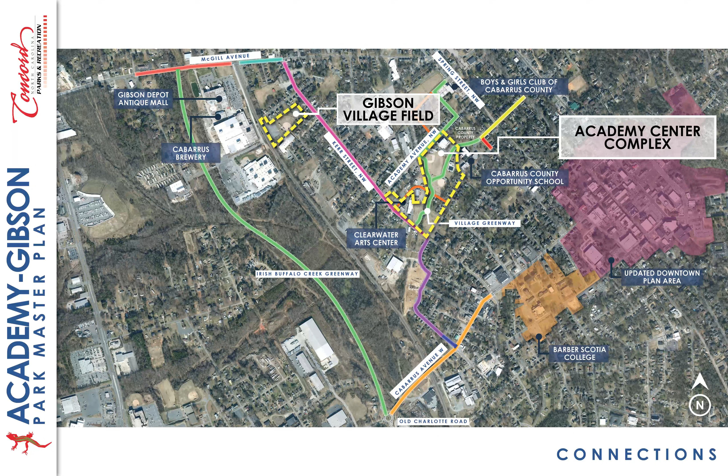In addition to plans for these areas, this presentation will suggest concepts for improvements to the pedestrian bicycle system in the Academy Gibson Village and surrounding communities. These improvements will make the parks, greenways, and other destinations in the community more connected and accessible by foot or on a bicycle. The master planning process started at the end of September 2020.

Site analysis was completed, and the first community survey was conducted in January of this year. Since then, we have coordinated with other stakeholders, made an initial presentation to council, and completed concepts for the parks and pedestrian and bike improvements along several community streets, including existing and proposed greenway trails.

We are now seeking input from the community on these concepts. The plan is to present the final master plan to City Council in January of 2022.

From the January survey, we learned about residents' recreational activities, needs, and aspirations. It is clear that residents enjoy and want more trails. In addition to trails, the facilities residents visit most include natural areas, playgrounds, splash pad, and picnic shelters. High on the list for requested facilities are more trails, playgrounds, natural areas, and off-road bike trails and a pump track.

With that background, let's jump into the proposed plans for the Academy Center complex. The property at Academy Center includes numerous athletic facilities, including historic Webb Field, McInnis Aquatics Center, McAllister Field, and the Recreation Center building.

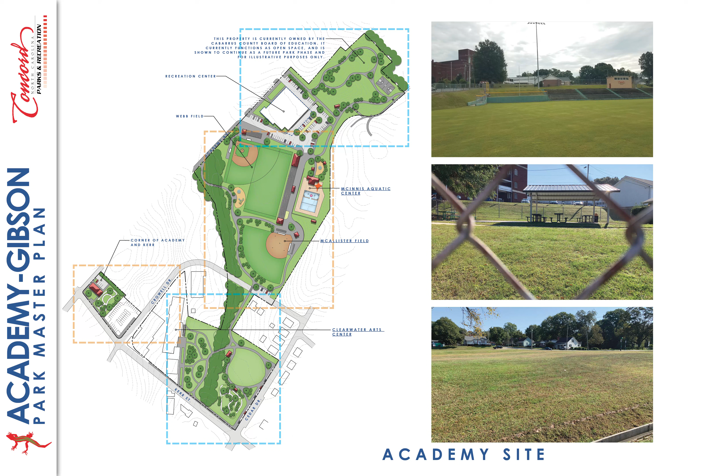This graphic also includes the Recreation Center. However, the expansion of the Recreation Center will be combined with other improvements to the central area. The central area includes renovation and/or expansion of the Recreation Center, as well as improvements to existing fields and McInnis Aquatic Center. The expansion of the building will provide more flexible space, new offices, and support space, as well as a new entry.

Associated with the expansion is the removal of the existing parking area in the front and the creation of angled parking along the street. Parking surrounding the building is also modified.

Webb Field and the existing grandstands are historic and remain in place, but need some upgrades to address accessibility concerns, including handrails and accessible seating. The field is proposed for realignment, making space for new restrooms, storage, and bleachers.

Adjacent to the existing grandstands, the plan calls for new buildings that would include ticket sales, concessions, and storage. A playground for children 5 to 12 years of age is proposed adjacent to Webb Field and accessed from the Greenway.

Improvements at McAllister Field also include a new restroom building, press box, and bleachers, as well as trails and sidewalks connecting to the Greenway and a small parking area along Crowell Drive.

At the McInnis Aquatic Center, improvements include a 50% expansion of the pool area and the incorporation of a zero-depth entry splash play area. Also illustrated is a shade structure over a portion of the pool deck.

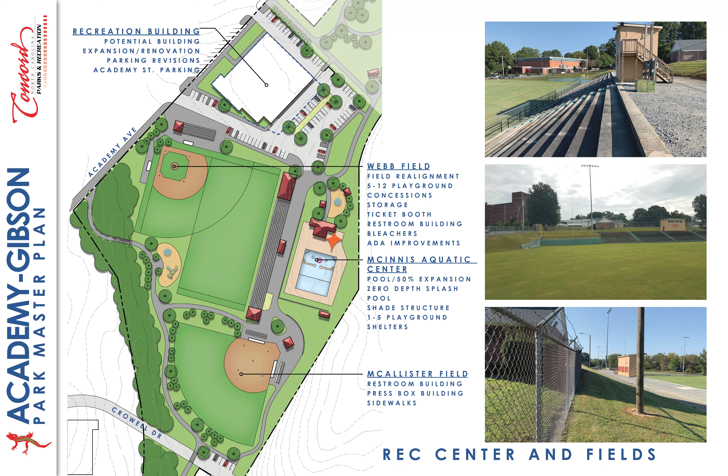The southernmost area is south of Crowell at the corner of Kerr Street and Cedar Drive and adjacent to the Clearwater Arts Center. The space is divided by the creek, and the existing village greenway also passes through, connecting to Kerr Street. Two alternative concepts for the development of this area have been prepared for consideration.

Both concepts suggest a sculpture garden with numerous pathways for placing public art on the west side of the creek and adjacent to the Arts Center.

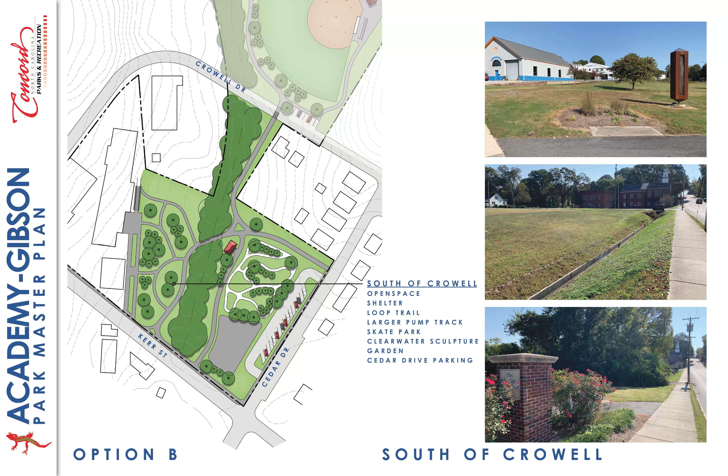The second concept, Option B, features a larger pump track, skate park, smaller open space, and on-site parking on the east side of the creek.

Also included in the project is the property at the corner of Kerr and Academy Avenue. There are 2 options as well for the development of this property.

Option A illustrates a shelter with restrooms, a bus stop, and a mini pump track for bicycles. Option B illustrates the shelter with restrooms, bus stop, and flexible open space in place of the pump track. Both options also include a small parking area.

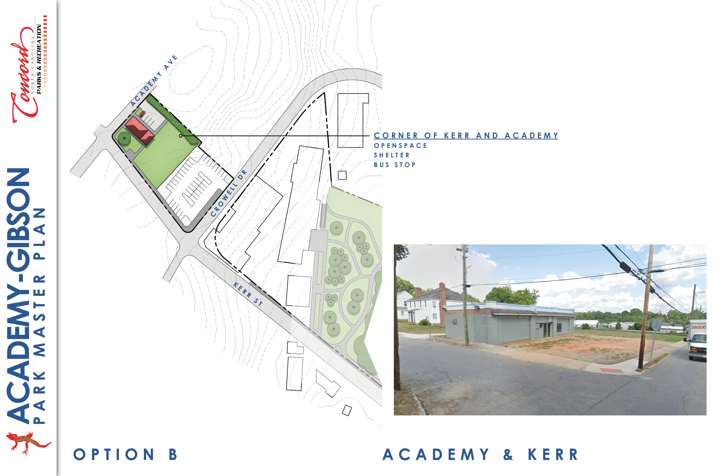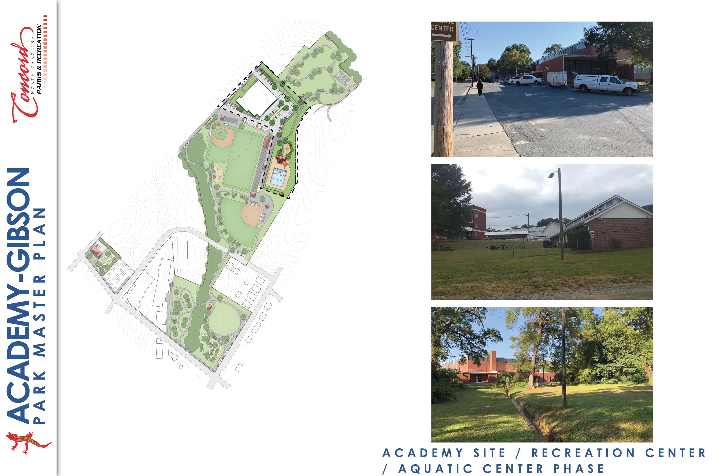We have identified 4 potential phases for implementation. The first of these may combine the improvements to the Recreation Center with improvements to the Aquatic Center. Also included are parking improvements and the Greenway Trail.

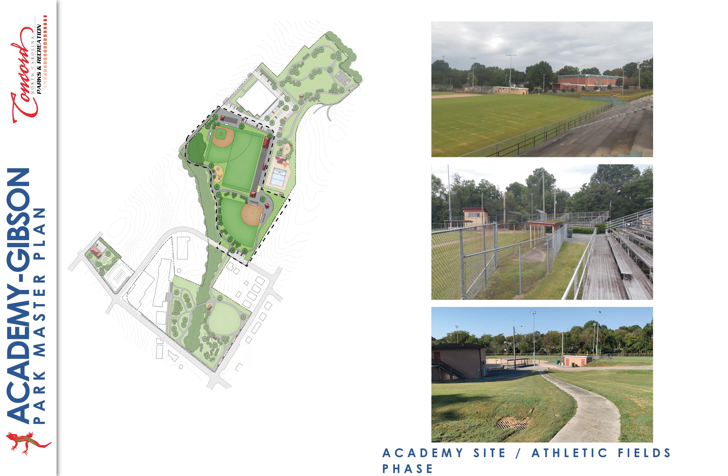A second phase combines all of the improvements to Webb and McAllister Fields. This includes fields, associated buildings, 1 playground, walks, and the Greenway Trail.

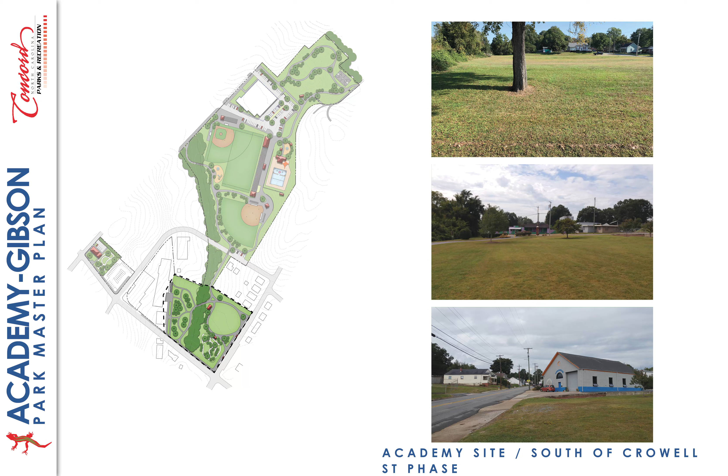A third phase includes all of the improvements illustrated south of Crowell Street. A fourth phase includes the improvements to the property at the corner of Kerr Street and Academy Avenue. The survey will ask you which of these phases should be prioritized.

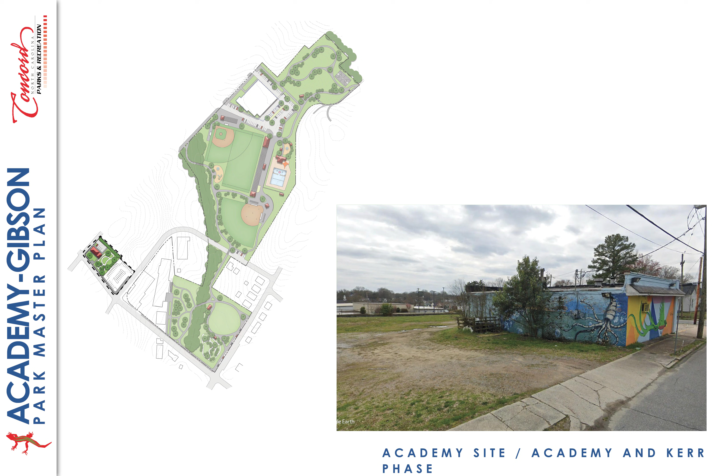Gibson Field is a 2.6-acre park sandwiched between residential land uses and the railroad corridor. The ball field has an important historic legacy.

The park is accessed from 2 streets, Kerr Street and Ballpark Court on the north, as well as Misenheimer on the south side. Parking exists at both ends of the park. The drive from Misenheimer is within the railroad right-of-way, as is a portion of the parking lot.

The park also has a small play area and several outdated buildings associated with the ball field.

The plan for Gibson Field suggests a slight shift in the ball field alignment to create space for a sidewalk on the east side. A second walk is also illustrated on the west side. These 2 walks will connect the parking areas to each other and provide access across the park and to both playgrounds. Other walks address accessibility issues and provide access to the bleachers.

Parking areas have been reconfigured. In addition, the plan calls for a fence to be installed along the railroad corridor. Existing buildings are recommended for renovation or replacement.

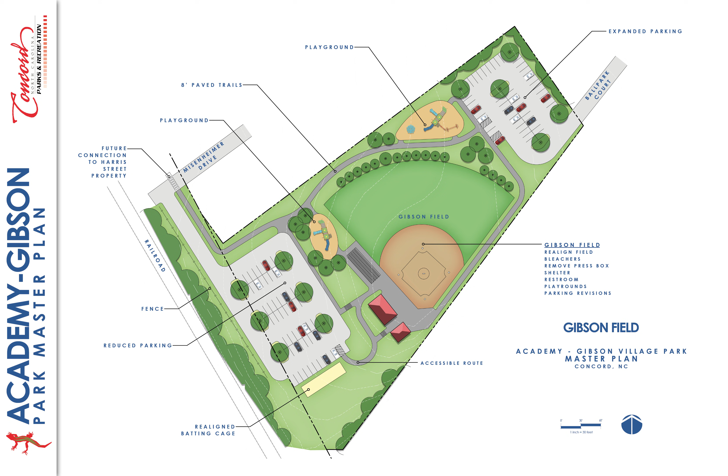In addition to the 2 park areas, the master plan also considers the improvement of pedestrian and bicycle connections between the parks and to other destinations along streets within the Academy Gibson community. Improvements include greenways, as well as improvements within existing street corridors.

In addition to the Village Greenway and the proposed Irish Buffalo Greenway, several streets were identified for improvements. These include McGill Avenue, Kerr Street, Cabarrus Avenue, Cedar Drive, Franklin Avenue, Powder Street, Marsh Avenue, and Beech Street.

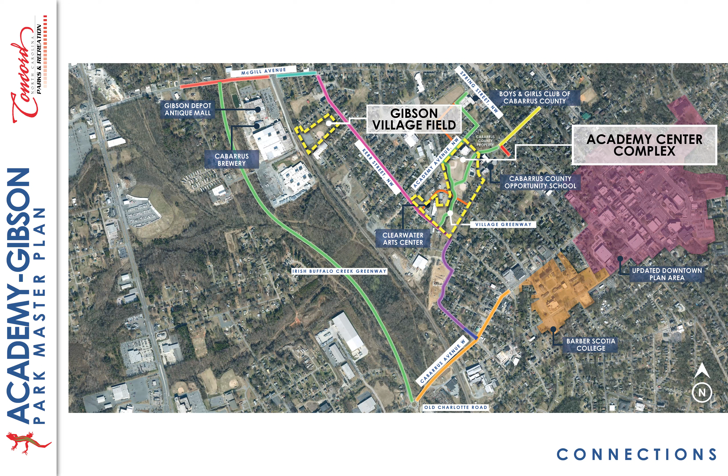We begin with Marsh and Beech. Improvements to Marsh pick up the greenway at the edge of the Board of Education property and illustrate a connection to Spring Street. This very wide street has been reimagined to include 2 lanes of traffic, green spaces between the curb and the sidewalk, and the introduction of a 10-foot wide multi-use path.

Beech has also been narrowed to 2 lanes, with parallel parking on one side and a wide green space between the curb and the sidewalk on the other.

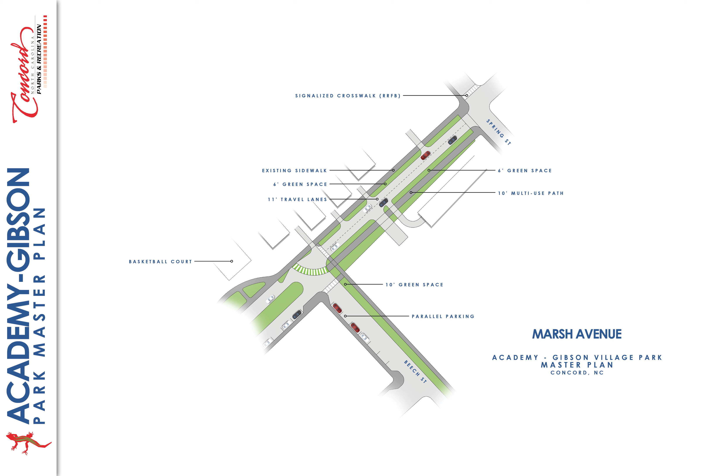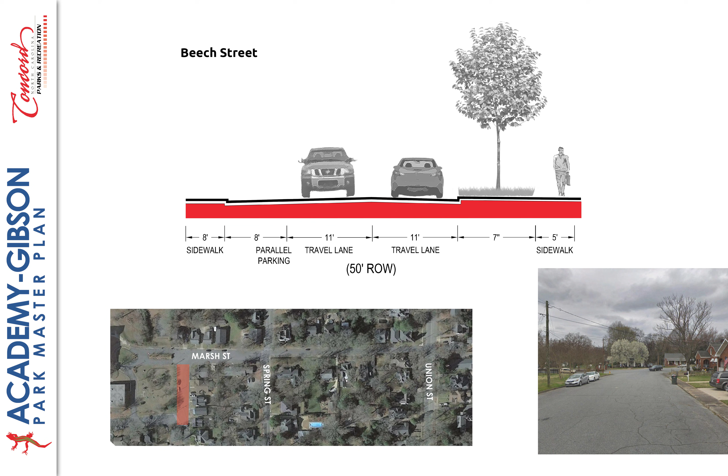The section for Marsh illustrates the relationships between the travel lanes, green spaces, sidewalks, and multi-use path. The section for improvements to Beech Street illustrate parallel parking along the southern edge and a green space along the northern edge. Improvements to McGill Avenue are illustrated from Central to KERR Street.

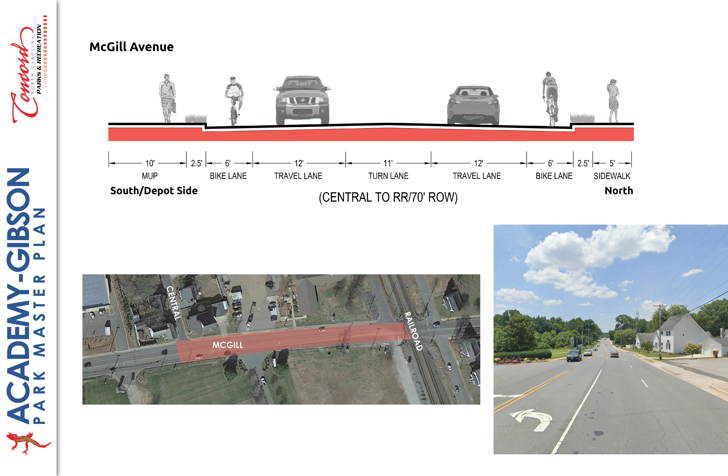Both have bike lanes and walks on each side. From Central to the railroad, the street includes a center turn lane, and the right-of-way allows for a 10-foot wide multi-use path on the south side.

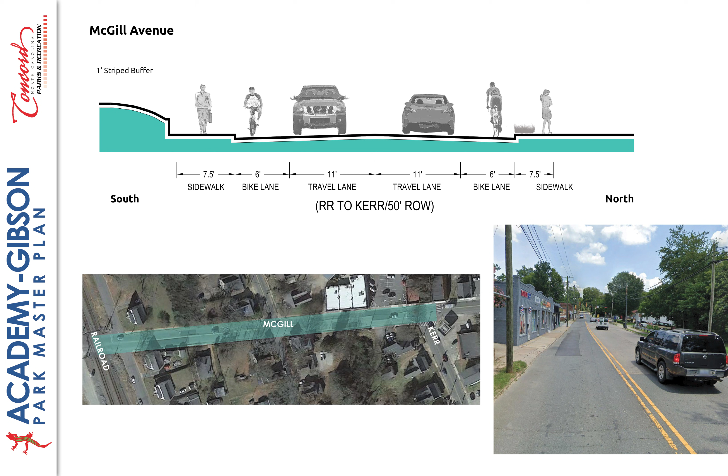From the railroad to KERR Street, the right-of-way narrows from 70 feet to 50 feet, eliminating the turn lane, reducing the width of the multi-use path to 7.5 feet, and eliminating the green space on the south side.

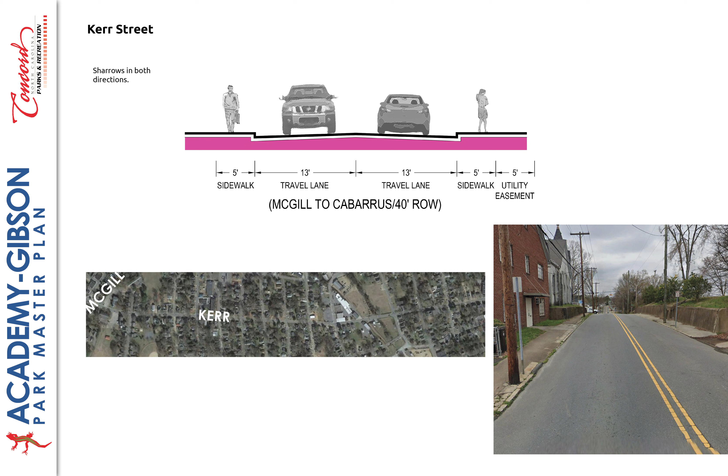On KERR Street, the right-of-way is 40 feet, permitting only sidewalks on both sides with a possible dedication of a utility easement. Bicycle sharrow markings along KERR Street are recommended to alert drivers to the presence of bicyclists.

It is proposed that Cabarrus Avenue from the MLK roundabout north feature bike lanes and sidewalks on both sides, with the benefit of separation by green space. The right-of-way of this corridor varies.

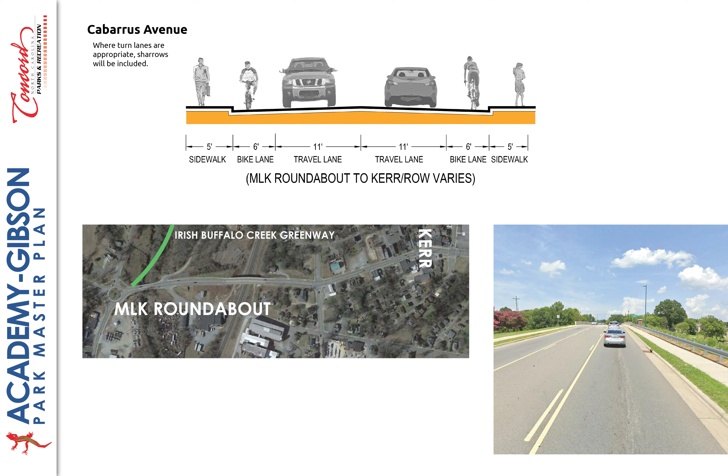Connecting the corner of Cedar Drive and Kerr to Cabarrus requires improvements to Cedar, Franklin Avenue, and Powder Street. The right-of-ways vary between 35 and 40 feet, so opportunities for improvements are limited.

Where possible, 10-foot lanes, a 3-foot green buffer, and a 10-foot wide multi-use path are recommended. Future infill developments may impact and create an opportunity for these improvements to be realized.

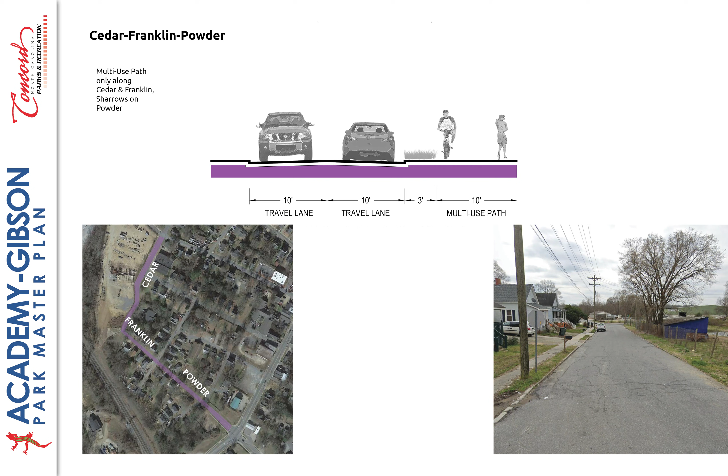Recommended greenways are envisioned to be a minimum of 10 feet wide with 2-foot shoulders on each side. The plan suggests for the Village Greenway to continue through the park for alternate connectivity to Spring Street. Irish Buffalo Creek provides a primary path from the MLK roundabout to the Gibson Depot at McGill Avenue.